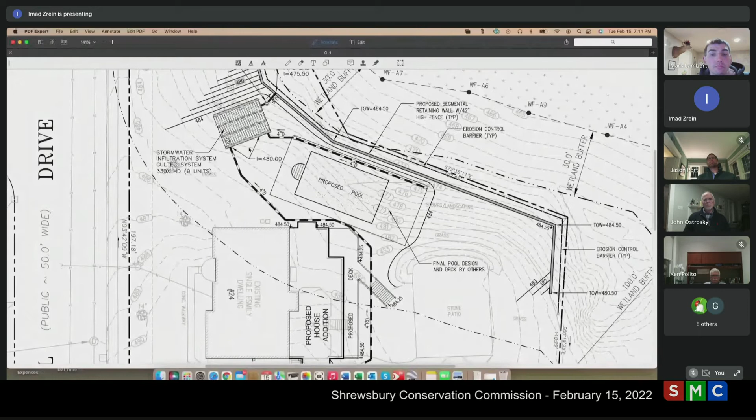So here's where the pool is going. In order to install the pool, since this is a sloped area, we have to build a retaining wall along this edge. It will be a segmental retaining wall, and the stormwater recharge system will be in this location here.

It's worth noting that all the work we're proposing is within existing lawn space or disturbed space, and we're totally out of the 30-foot buffer zone. Here's the 30-foot line, which goes from outside the property to inside the property in this location. All the work will be done completely outside the 30-foot line, in some places 4 or 5 feet away, in others 15 or 20 feet.

That's pretty much the proposal in a nutshell. Can you just explain the detailed construction on the wall? Roughly, what's the elevation drop on it, and what type of wall are you using?

It's the segmental type of wall, the big block wall that you see here, which is ideal for construction and fill situations. Can you go to that detail on the wall? Do you have a detail? Yeah, I'm showing that detail right here.

We can't see it on our screen. Can you see anything on the screen? We got the blow up. I think you have to go back to the original size of the drawing and then zoom in on that detail. We have the blow up of the swimming pool area right now. Can you see that? No, nothing's changed. Let me close it and reopen it. Can you see that? Yes, now we can see it.

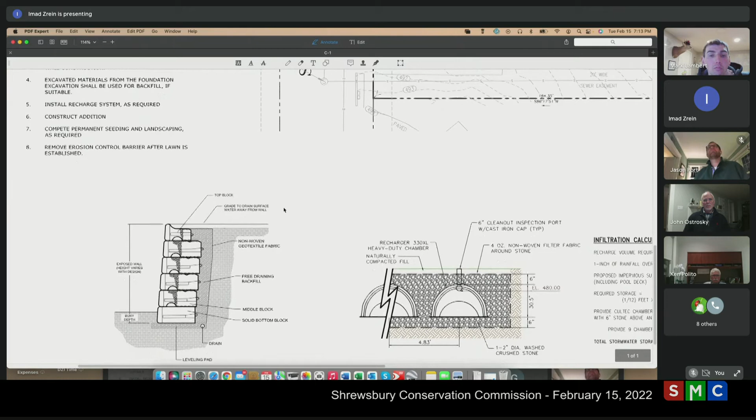Okay, so basically what I was saying, segmental retaining walls are ideal for construction and fill. They provide minimal disturbance to the downside. You put the erosion control on the low side, and we start building up those segmental pieces, and as the segmental pieces go up, the fill goes behind it simultaneously.

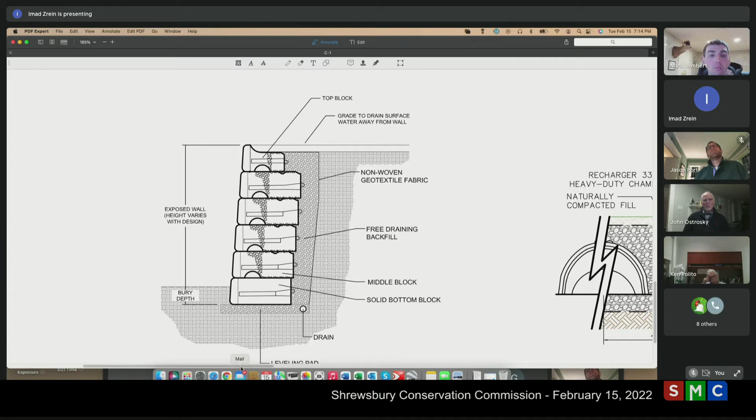So this is basically the detail of the retaining wall, in terms of the elevation at the top. Yes. Can you see the plan now? I have to close it and reopen. It's a little tough to see.

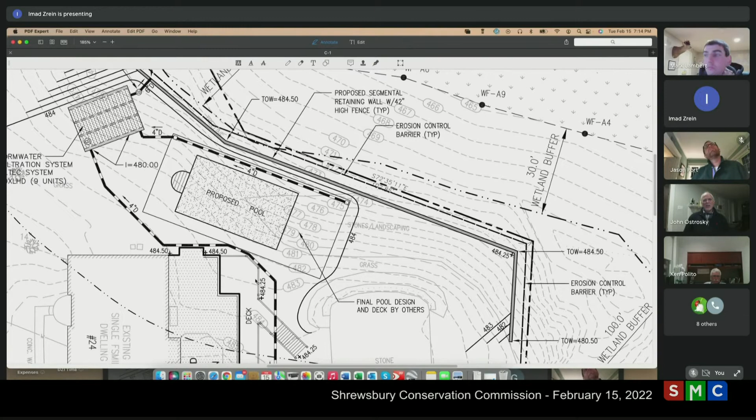If you can give us, in general, the grades along the bottom are in the 473 range, and the top of the wall ranges from 480 to 484, plus or minus. So the worst case is about 10 to 11 feet high in this location here, and then it drops off as we go left and right of the swimming pool, but behind the swimming pool is basically where the wall is the highest.

There would be a fence on top of the wall, for security and safety reasons, and also to keep everything on site. Is that shown on the plan? I can't see the detail on the fence. We're calling for a proposed segmental wall with a 42-inch high fence on the plan. Yeah, it's called off on the plan, in the notes and on the plan itself, yes.

Jason, do you have any questions? No, I do not have any questions. Ken? I'm all set for now.

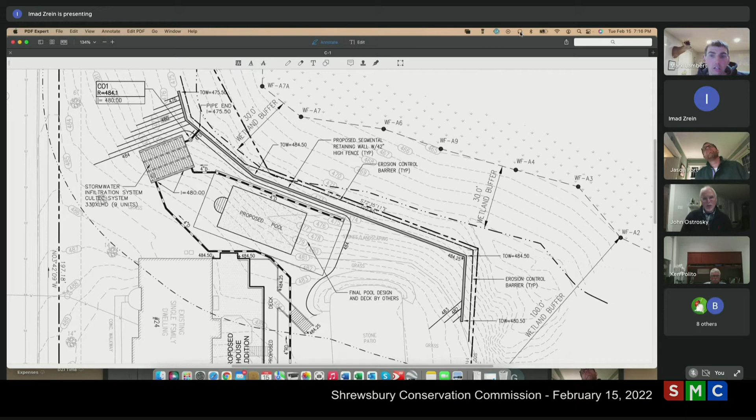A question on tying back that wall into the upper slope. Is there any requirement with that manufacturer's block wall to have tiebacks? No, not for this type of wall and height. Given that you've got an 11-foot difference in elevation in places. So that's a significant elevation change, and there's no requirement for a tieback at all? My understanding for those big block walls, they're 3 feet wide - they're gravity walls, they don't need tieback. So the block wall itself is 3 foot wide by 2.5 feet high. Okay, they're real hefty blocks.

Brad, do you have any questions? I'm all set. Last chance for Jason. I'm all set. Does anyone in the public have any questions or comments on this hearing? I'm not hearing anyone, so we will close the hearing. All right, thank you.

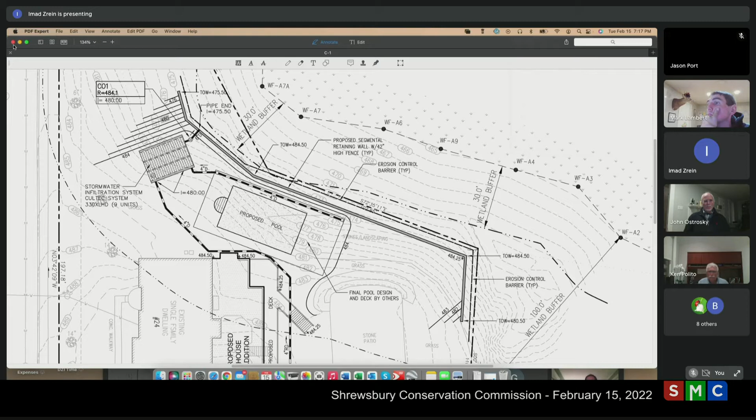Okay, moving on to our next new hearing. Notice is hereby given in accordance with the provisions of General Laws, Chapter 131, Section 40, that Mark Lambert, 25 Fairbanks Street, West Boylston, Mass., has filed a request for determination of applicability for the removal of trees at 1 Bowdoin Street. A public meeting will be held on the above notice at 7 p.m. on Tuesday evening, February 15th, 2022.

All right, the presenter was here. Are you there? Yep, I see you. Go ahead, Mark. Why don't you walk us through - I saw some of the submittals you presented, and you basically took a GIS drawing and segmented it into work areas, like 1, 2, 3. And then you had a table with descriptions of the work within those areas. Can you go over those for us? I was a little confused on the numbers you were talking about, all the areas and whatnot. It said remove trees, but I didn't know if that was 2 trees or how many, so if you could just go through that so we can get an idea of the scope or magnitude of this cutting.

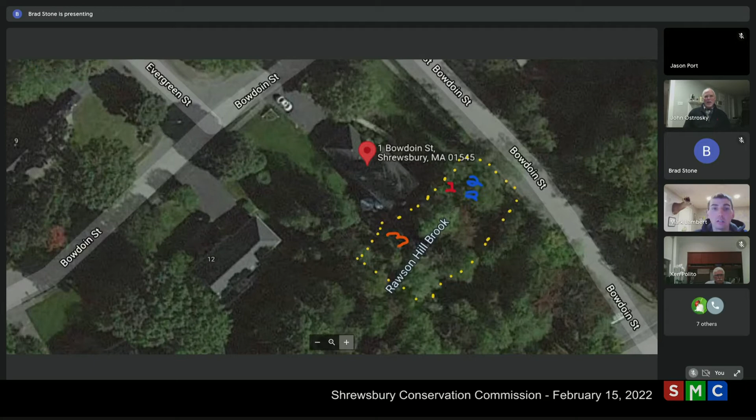All right, Brad, can you blow that up a little bit where the work area is? Yeah, that helps, that's good. So that's the work area there. Can I pull over my proposal again? Is there a place to do that? I don't think you can co-share a screen. But you can describe it to us, read what your proposal says. Sure, get back here.

So under 1 right here, it's identifying tree removal of identified trees - a large cracked maple top. We'll cut out the crack, leaving the remaining stem of the tree in the ground, but removing the cracked off part, then chipping up and removing the debris from the crack. The tree is basically cracked in half and leaning into the wetlands, and the homeowner wants to clean up this area. So we're talking just one tree there, Mark? On this first one, correct. Okay, so each area is identified and then goes according to the proposal as well.

And then, so number 2 here, it's tree removal of identified trees - a small cracked maple top and a fallen dead maple stem. So there's 2 of them right there, a fallen cracked maple top and a fallen dead maple as well in that area.

Those are two separate trees? Two trees. Yep, so now we're up to three, okay.

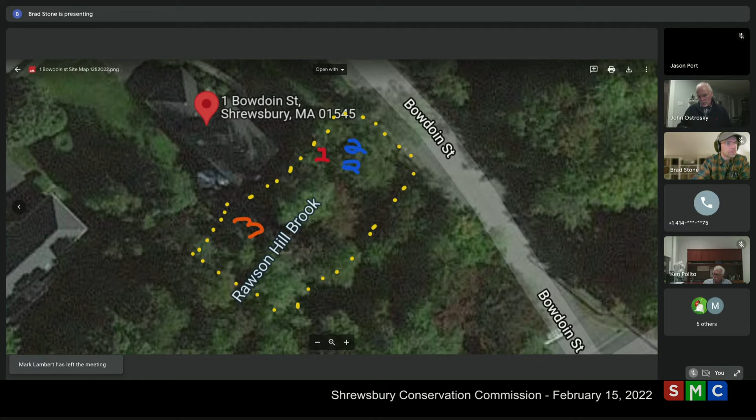Okay, moving on to our next new hearing. Notice is hereby given in accordance with the provisions of General Laws Chapter 131, Section 40, that New England Power Company, 40 Sylvan Road, Waltham, Mass., has filed a notice of intent to perform exploratory borings for a subsurface investigation along the O141/P142 transmission line right-of-way to support design work for the O141/P142 asset condition refurbishment project located at 316 Boston Turnpike. A public hearing will be held on the above notice at 7 p.m. on Tuesday evening, February 15th, 2022.

And do we have the presenter? Is that Maria? Yes, thank you. Go ahead, why don't you introduce yourself, Maria? So I'm Maria Firstenberg from TRC. We're representing the applicant in this case, which is New England Power Company, doing business as National Grid.

I am going to share my screen. Why don't you blow it up to the work area too, Maria, if you can? Yes, so this is actually just the site locus map. Just to get it a bit bigger, it's really tiny on our computers, if you can. Can you? Yeah, that's better. Yeah, then just scroll over to it. That's perfect — the highlighted red parcel here is the parcel that we're talking about.

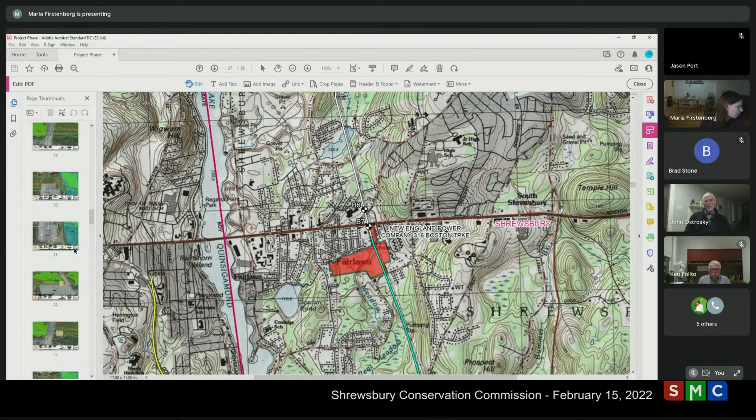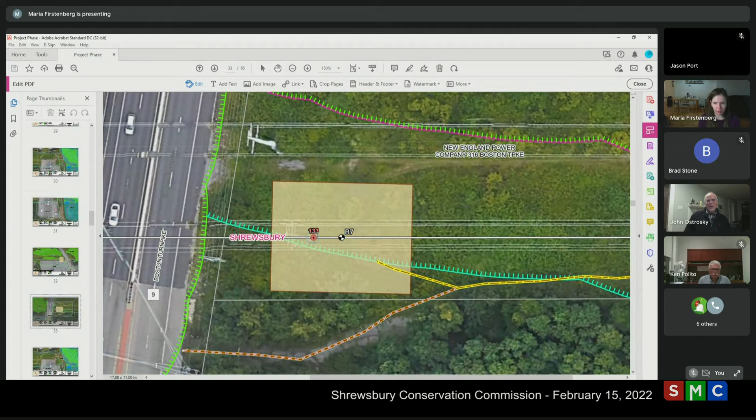Can you all see that? Yes. All right, so essentially what's being proposed is that these soil borings are collecting geotechnical data that New England Power Company needs so that they can finish their engineering design for structure upgrades that are going to happen down the road, timeline-wise. Borings are being requested in these areas specifically because the geotechnical information they have is too old to use, so they're essentially updating the information they have on file. Boring 7 is where the new structure is proposed eventually that will be replacing structure 133.

I'm going to zoom out a tiny bit so I can show you the resources that are here.

As it loads, there is a stream mapped along the top of this sheet. I don't know how well you can see it, but it's a dashed blue line with green flag points, and USGS maps it as a perennial stream.

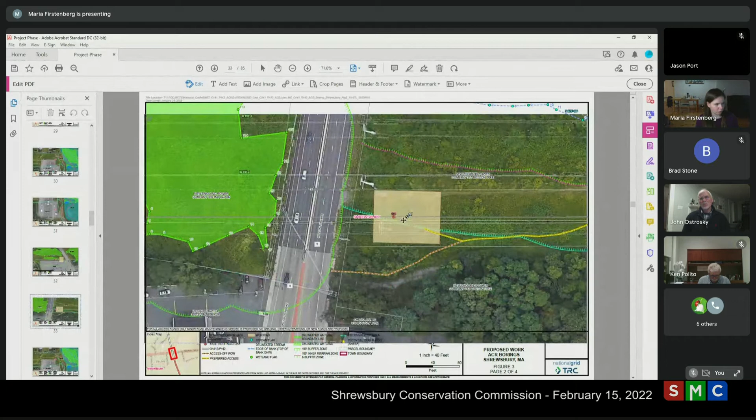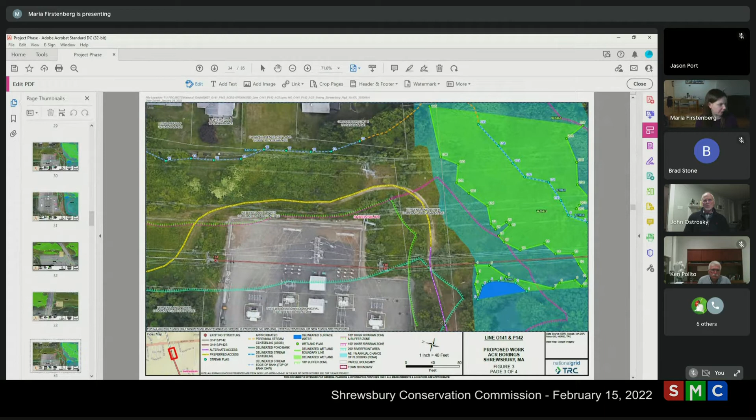Here we go. So we're starting at the boring and backing up around the substation, following the yellow line. This is the substation down here, and this is the existing path you can see on the aerial image that they'll follow to get in there. Then this is where it connects to Rolfe Ave, just south of the substation.

So the idea here is that they are following the purple line that turns into yellow so that they are staying on New England Power Company owned property to access the soil boring.

Maria, we're still talking just one boring, right? Yes, this is just one soil boring. Holy smokes, okay.

So the existing pathway is already cleared. They aren't proposing any maintenance to it. They just need to access that location so that they can do the soil boring, so that they can finish their engineering design.

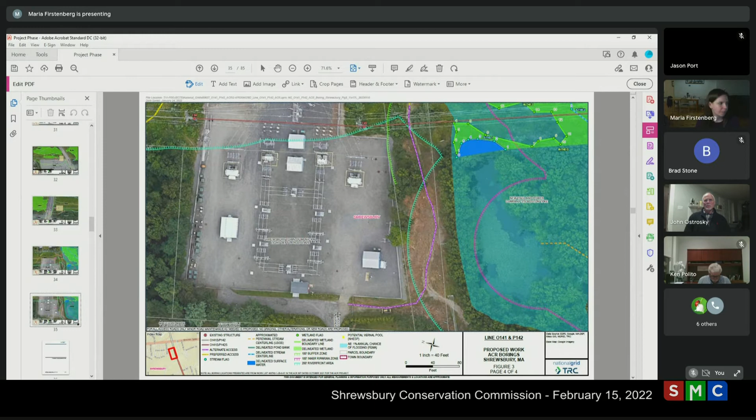All right, I think we probably got the gist of it. The access is across all existing roadways, one soil boring. Doesn't much matter what kind of rig they're going to use to get in there because it's all existing roadways, so whether it's a wheeled vehicle or a tracked vehicle doesn't matter. And I'm sure this work will be done in a day's time, probably a fraction of a day.

All right, are you ready for questions, or do you have anything more you'd like to tell us? No, I am absolutely ready for questions. Okay, Jason? No questions, I'm fine with this. Ken? All set. Brad? I'm all set, thank you.

All right, let's go to the public. Does anyone in the public have any questions or comments on this hearing? All right, I'm not hearing anyone, so we will close the hearing, Maria.

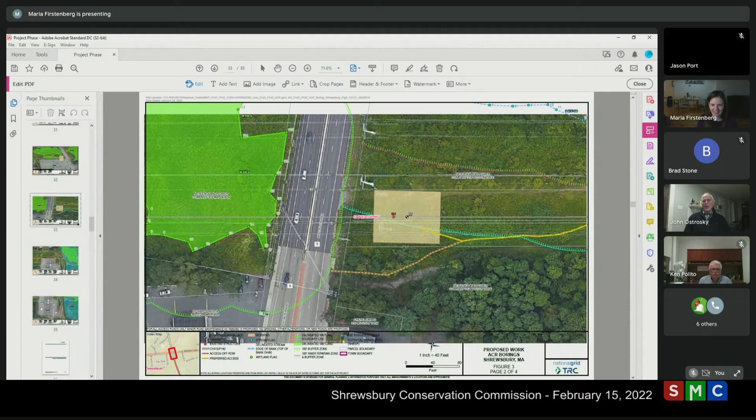Awesome, so just to be clear, are you able to vote to issue an order of conditions for it then? Tonight we will vote on it, yeah, at the end of our hearings. We will take a vote whether to issue one. Okay, all right, thank you. You can stay tuned in if you want, there's only a couple more hearings and we'll be into our voting session. Okay? Sure, thank you. All right, so this hearing is closed.

Okay, moving on to our next new public hearing. Notice is hereby given in accordance with the provisions of General Laws Chapter 131, Section 40, that Erica Ernenwein, 111 George Hill Road, Grafton, Mass, has filed a notice of intent for the replacement of a septic system of a single-family house and associated site work within the buffer zone of a bordering vegetated wetland at 2 Brook Lawn Parkway. A public hearing will be held on the above notice at 7 p.m. on Tuesday evening, February 15th, 2022.

Okay, do we have the presenter? Good evening, I'm Kate O'Donnell from EcoTec, representing Erica Ernenwein. Paul McManus from EcoTec will also be in shortly, if he's not in already, to answer some questions as well. Okay, so if I can share my screen.

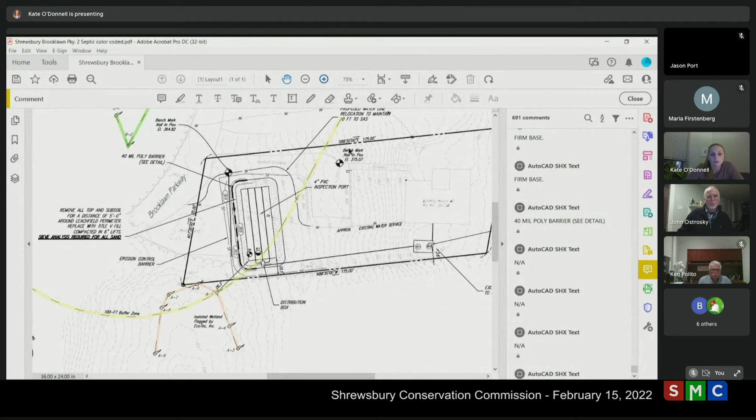So the project site, can you guys see this? Yes. Okay, can you blow it up where the septic system is? Is that- yeah, can you go a little more? One more. Is that good? Yeah, and if you slide it, can you slide it a little off, catch the septic tank? Yep, that'll be good.

So the project site consists of an existing single-family house, located here, as well as driveway and lawn.

I was present on the site in November of 2021 to delineate the wetland resource areas, and I delineated a bordering vegetated wetland off-site to the north, as well as an isolated vegetated wetland, which is not subject to the Wetlands Protection Act, off-site to the south.

And the proposed project is to replace a failing septic system. As part of this, they will be relocating the existing water service around the leach field. And the proposed septic system is within the 100-foot buffer zone to the bordering vegetated wetland, but it is located more than 50 feet away.

The current conditions of the site are lawn and will remain lawn. And lastly, we are proposing straw wattle and silt fence erosion control barriers at the limit of work right here. And I can answer any questions that the commission has at this time.

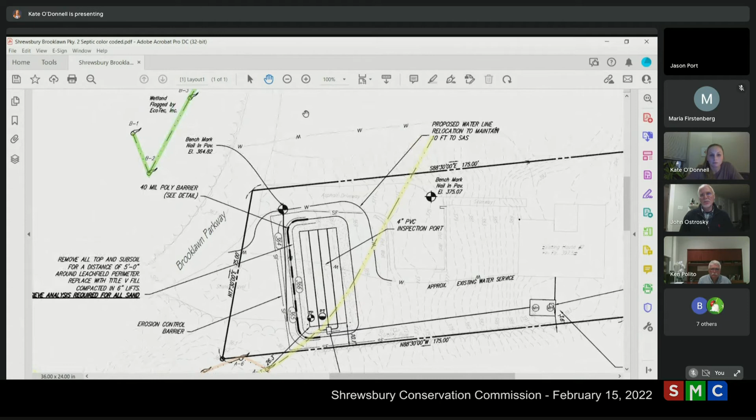A question for you, I don't know if you'll have the answer. Do you know if this is a full gravity system? Yes, it is a gravity system. And I know it can't meet the side slope breakout, so they put in basically a 40 mil poly barrier between the wetland area and the soil absorption system. Okay, which is all code legal.

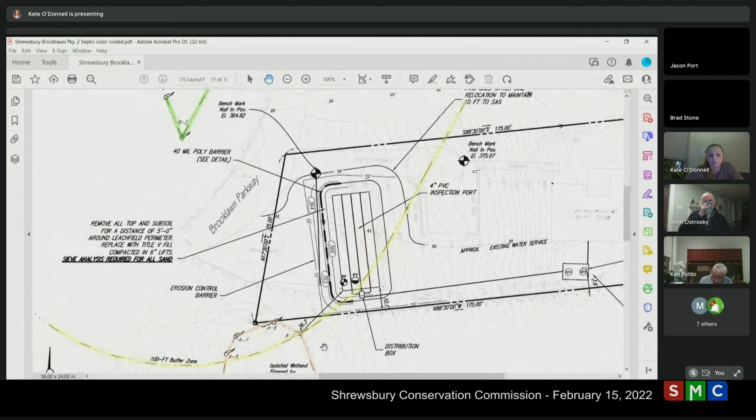Okay, Brad? So I have seen those wetland areas in the past. It's definitely a BVW there to the north. The bottom one is isolated. I don't know if it holds a quarter acre foot or not, but there's no proposal to touch it, so it's really a moot point. I didn't go to the site as part of this application, but I've driven by there multiple times for other filings and other matters before the commission, so I know very well what it looks like on either side of Brooklawn Parkway there. So I'm okay with what's being proposed.

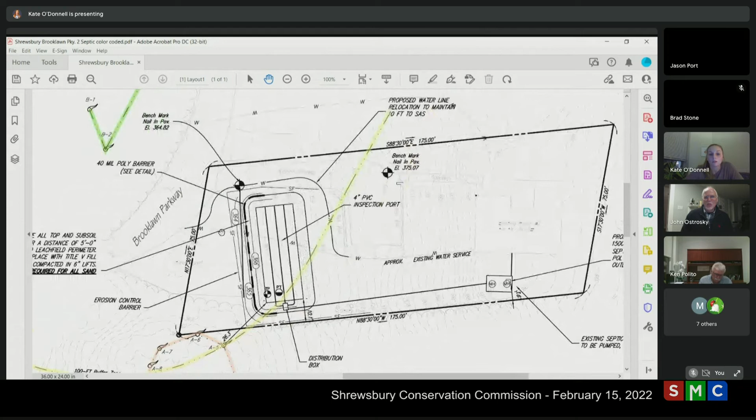Okay, just a question. You said a water service was being relocated. Where does it come from, is it town water or a well? Don't believe it's a well. And it's coming in off of Brooklawn Parkway there. And they got to keep that 10 feet away, I think, from the soil absorption system. Is that shown on this plan, the relocated water service? So yes, it's this W line where it's being relocated, and this is where it currently is. Oh, okay, I see it now.

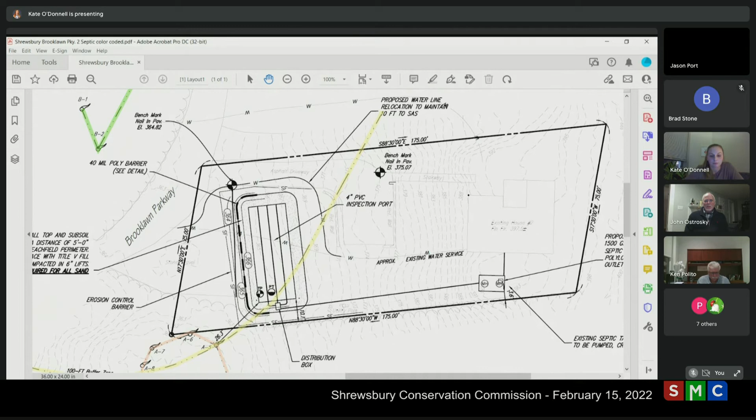Okay, does anyone in the public have any questions or comments on this hearing? All right, I'm not hearing any, so we will close the hearing. Thank you. You're welcome.

Okay, moving on to our next new public hearing, and it's also our last one of the night. Notice is hereby given in accordance with the provisions of General Laws, Chapter 131, Section 40, that MAG RE Holdings, 800 Turnpike LLC, 777 Washington Street, Newton, Mass, has filed a request for determination of applicability for the demolition of a building and portion of another building at 420 Boston Turnpike. A public meeting will be held on the above notice at 7 p.m. on Tuesday evening, February 15, 2022.

Good evening, Garrett Horsfall with Kelly Engineering Group, site civil engineer associated with the project. I'm also joined tonight by John Schirkenbach of McGovern Automotive Group, who is the applicant and owner for this proposed project. I just want to share my screen here. Yes, this is John, I am on as well.

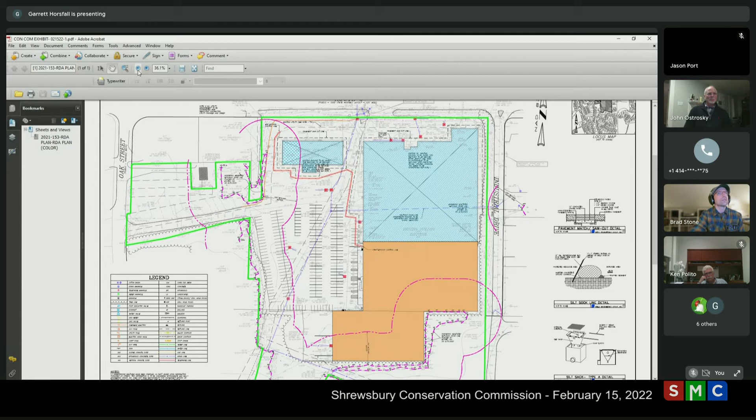Yep, just give me 1 second. I'm pulling that up right now, John. Right, so back—

In December of 2012, the commission started enforcement of the site, issued an enforcement order. It progressed a little bit slowly, I would say, and ultimately we had the owner at the time come before the commission to finally deal with that and got an order of conditions that was issued in July of 2013.

One of the things in that order that I'll note is that the commission did want to see the replication area done to mitigate some of the violation activity that had happened there. And the commission specified a timeline for that, and that's because of the enforcement order.

When the commission issues a typical order of conditions for wetland replication, it's usually up to the applicant when somebody comes in with a project proposal, whether they do it or not. So that language isn't usually in those orders. This one specified a timeline simply because it was there for mitigation for an outstanding enforcement order.

So to my knowledge, that wetland replication has not been completed at this point. The order of conditions is recorded at the Registry of Deeds. That does show up in the title there. But the commission also has not issued a certificate of compliance.

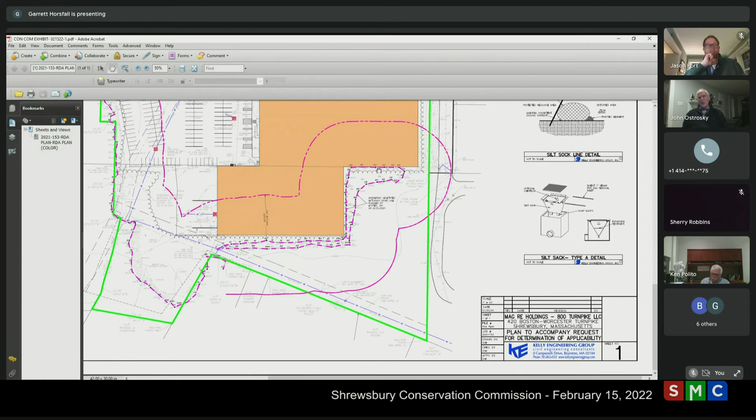Okay, let's see if there's anyone in the public that has any questions or comments for them tonight. Does anyone in the public have any questions or comments on this hearing?

All right, I'm not hearing any. Just to get back to our action tonight, obviously it doesn't sound like we would be comfortable giving a negative determination. We will take it to a vote.

Typically on demo projects we do require notices of intent also, Garrett. So this would be a little unusual for us to do. I know you're saying there's little chance that things can go bad with sediment migration and stuff, but things do go bad, we've found out over the years. So our policy's been to require NOIs when it's down to demo, especially on a major site like this. And what you guys are proposing, we're all for it, there's no question about it. We just want to be consistent with how we've handled other projects in the past.

So, Brad, if we vote tonight and give a positive determination, it just means they'll have the option to file a notice of intent for this limited amount of demo after they clear up the enforcement order work and get a certificate of compliance on the past work, or they could wrap it into the total project plan. I'm not sure how their schedule is playing out. If it's possible to push this off into the major work plan - Garrett, is that schedule going to be segmented where you have to do this limited demo up front, or is that something you can push into the total project plan?

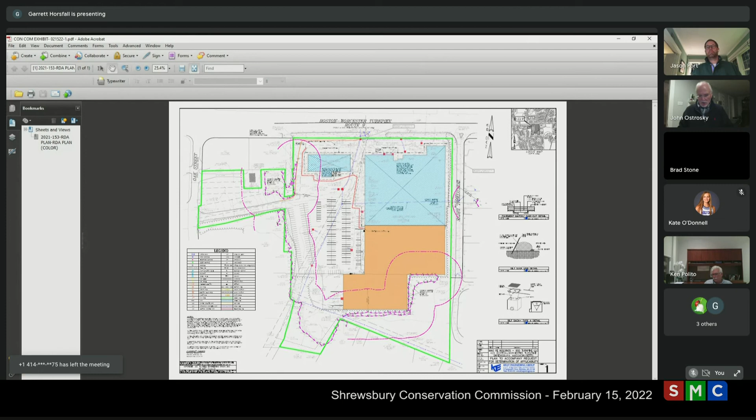Mr. Chairman, I'd like to make a motion we issue an order of conditions for 24 Cheryl Drive. All right, that was pretty clean with no conditions, right, Ken? I couldn't think of anything. Correct. Do we have a second? Second. Okay, all in favor, roll call. Ken, aye. Jason, aye. John, aye.

And then 1 Bowden Street, that was an RDA, we already voted on that one. Yep, correct.

And then we got 316 Boston Turnpike, Ken? Mr. Chairman, I make a motion we issue an order of conditions for 316 Boston Turnpike to install some borings. Do we have a second? Second. Discussion - I just want to enter a concern, I'm noticing there's no file number for this, Brad. I believe that came in late today, let me verify. Yes, that's correct, it came in today. Okay good. So we got a motion, a second, we'll do a roll call. Ken, aye. Jason, aye. John, aye.

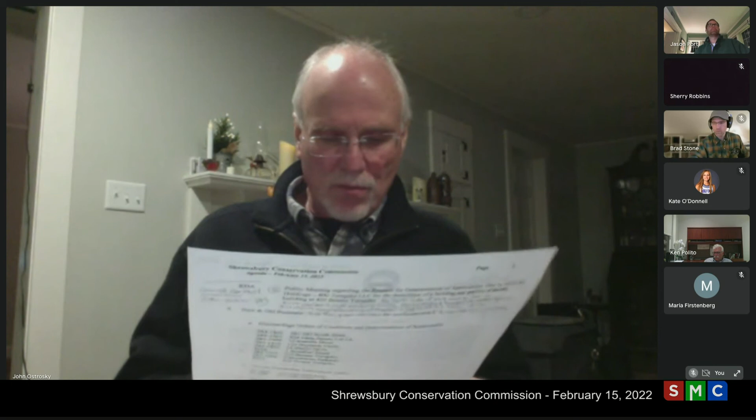And what else do we have? We got 2 Brookline Parkway. I make a motion we issue an order of conditions for 2 Brookline Parkway for the installation of a new septic system. Do we have a second? Second. All in favor? We'll do a roll call. Ken, aye. Jason, aye. John, aye.

And we voted on the RDA on the last one, so we're all set there.

Outstanding enforcement orders, Brad, 14A Deerfield Road, there was nothing new on that, you said?

Before we get to that, John, can we just go back to the new old business? So last month we did close 116 Boylston Circle, but we deferred voting on it because there was no DEP file number at the time. So there is a file number now, so the commission does need to make a decision on that one.

Do we have everybody present who can vote on that one? I assume we do. You were there, Jason, right, last month? Yeah, I was there. We were all there. Three of us were there. Do you want to make a motion, Ken?

I make a motion to issue an order of conditions at 116 Boylston Circle. Do we have a second? Second. All in favor? Roll call. Ken, aye. Jason, aye. John, aye.